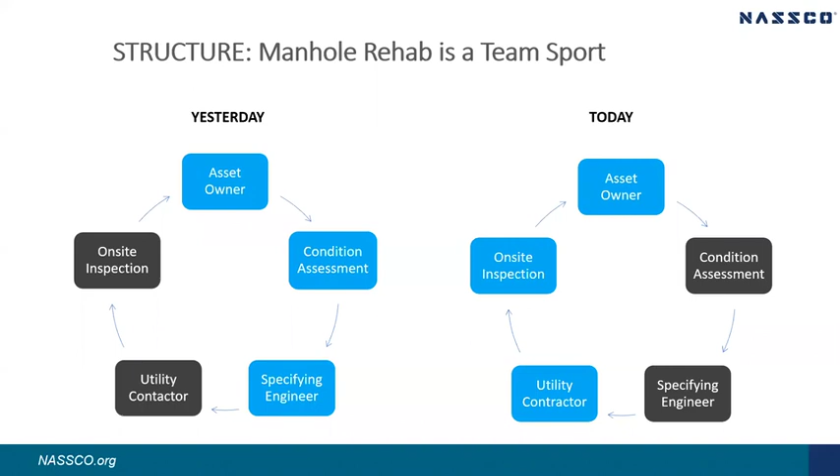To recap, yesterday we opened with the asset owner, Drew Muirhead, City of Brentwood, Tennessee, followed by Jim Harris of Jacobs on condition assessment, followed again by the voice of a specifying engineer, Carol Giokas of RJM Group. Today, we will open with our utility contractor, followed by on-site inspector, returning once again back to our asset owner to compare life before and life after a comprehensive team effort on manhole rehab with the City of Brentwood, Tennessee.

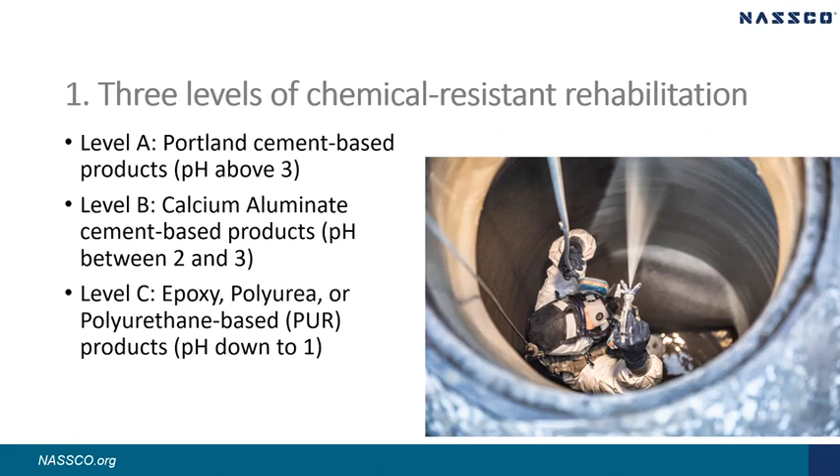My second point is that regarding calcium aluminate cements, please note that not all calcium aluminate cements are alike. There are 100% fused calcium aluminate cements where the cement and the aggregate are both calcium aluminate. And then there are calcium aluminate blends where the calcium aluminate is the cement, but the associated aggregates are less expensive materials.

Performance-wise, the differences are: 100% fused calcium aluminate performs down to a pH of 2, while the blended products perform down to a pH of around 3. If a design engineer does not specify, the contractor will choose the less expensive option, but the structure will not be as well protected in the more acidic environments.

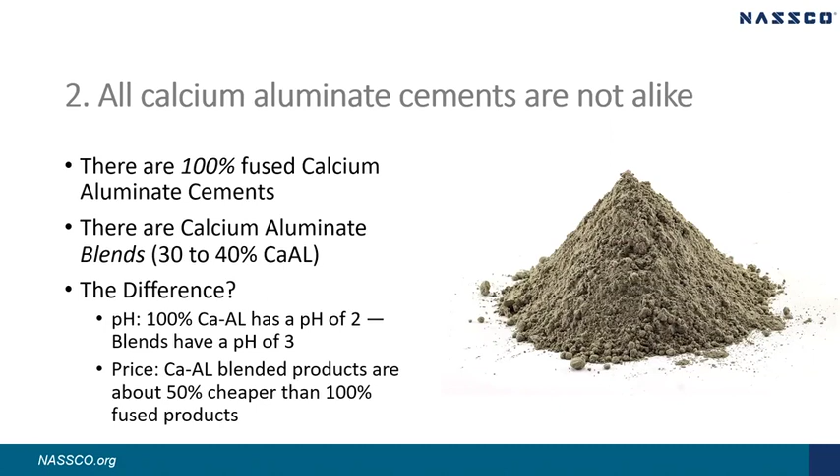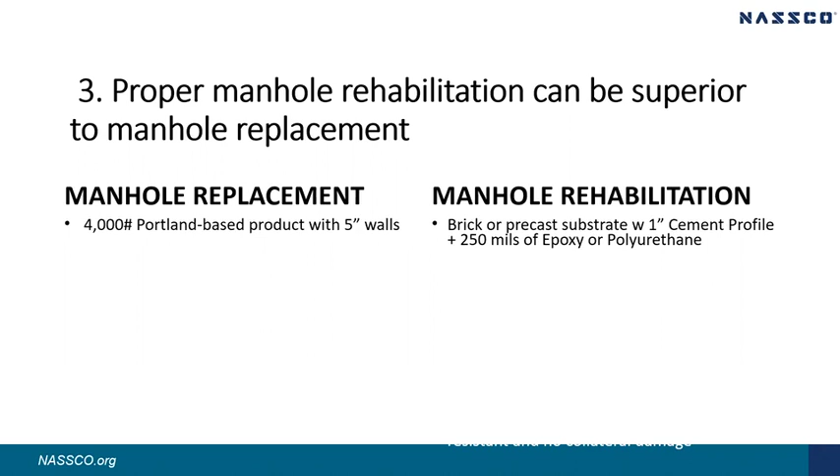Point 3: when making a replace or rehabilitate decision regarding a manhole, we often think that it would be best if we could just replace the manhole. However, proper manhole rehabilitation can be superior to manhole replacement in many cases. Let's compare replacing the manhole with 4,000-pound Portland-based precast sections versus spraying the existing brick or concrete manhole substrate with 1 inch of engineered cement profiling material and then topping it with 250 mils, i.e. a 1/4 of an inch, of either a polyurethane or an epoxy.

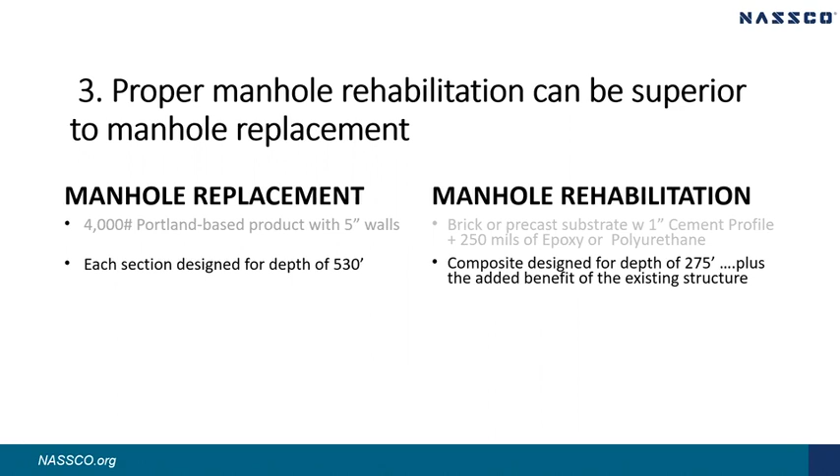In the case of replacement, each precast section is designed to a depth of 530 feet. Conversely, the cement profiling plus 250 mils of epoxy or polyurethane can perform down to a depth of 275 feet, plus the added benefit of the underlying structure.

The rehabilitated manhole will enjoy monolithic strength and cohesion, whereas the precast sections will suffer from weak points at each joint. The monolithic nature of the rehab manhole means that it will enjoy improved tensile characteristics and will not easily separate under hydraulic loading. I have seen precast cone sections separate at the barrel sections due to hydraulic uplift. This happened to manholes in a city in southeast Tennessee near the Tennessee River during a flood event.

Furthermore, since the composite rehabilitation enjoys acid-resistant polymer resin coating, it will enjoy excellent protection against microbial-induced corrosion. Manhole rehabilitation can enjoy the benefits characteristic of no-dig technologies. There will be no collateral damage to streets, sidewalks, yards, or other utilities, not to mention reduced public inconvenience.

So in many cases, the rehabilitated manhole will be lower in installation cost, plus enjoy the added benefits of being monolithic, acid resistant, and less disruptive to the environment.

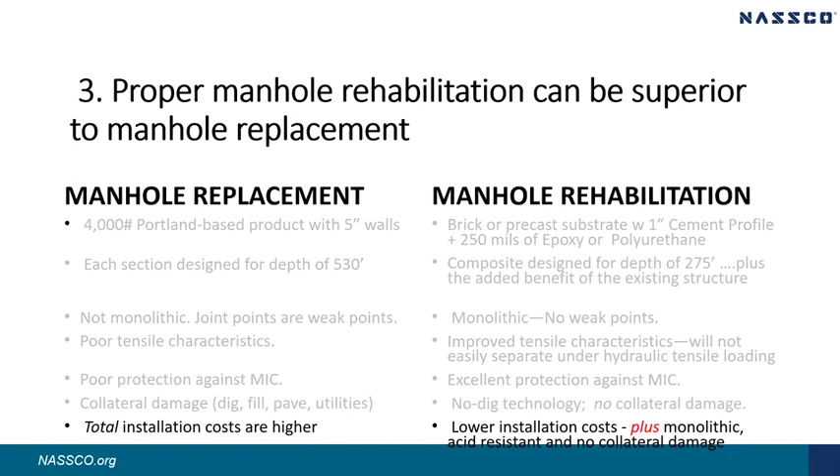My next point is that better sewer system containment is actually contributing to increased corrosion of concrete and brick manholes. As more basins are rehabbed to prevent stormwater infiltration, there is less dilution of the sewage. More systems are built with grinder pumps and lift stations that can cause splatter. More lids with holes in them are being replaced with solid lids, and in many places, specifications are calling for watertight bolt-down lids. These factors result in fewer opportunities for the system to breathe and more opportunities for latent bacterial growth that are the precursors to microbial-induced corrosion.

We see this anecdotally when we flip lids and see aggressive amounts of rust flaking off the bottom of casting lids. The point I'd like to make is more and more manholes will require level C polymer resin-based solutions in the future.

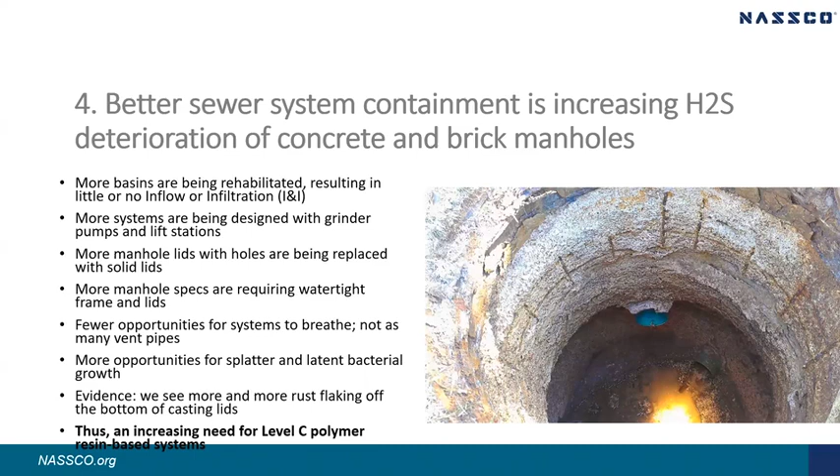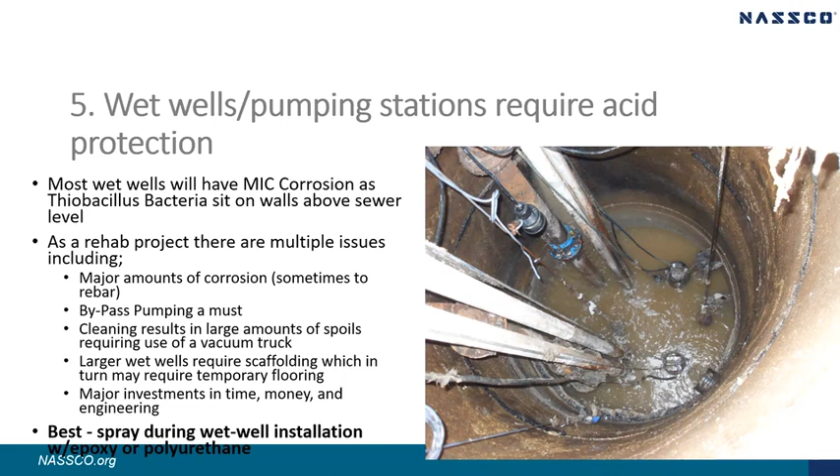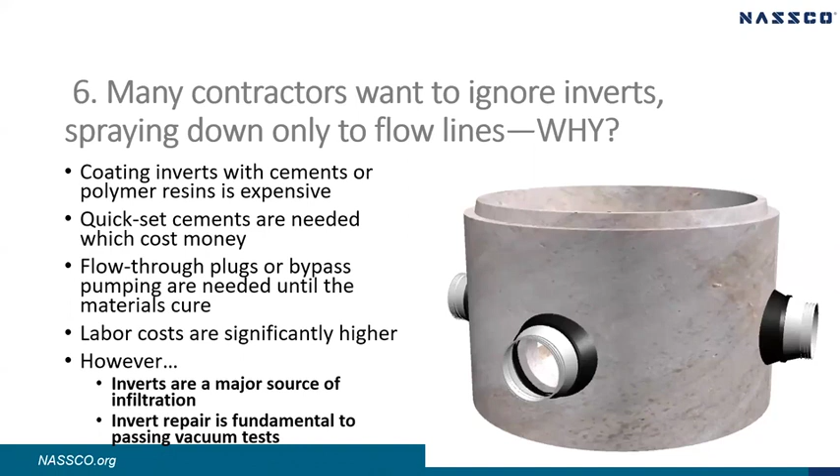Point 6: there are those who want to seal the manhole down to the flow line but avoid coating the invert. Why? Coating inverts with cements and/or polymer resins is expensive. Expensive quick-set cements are usually needed. Flow-through plugs and/or bypass pumping is needed in order for the materials to cure, and labor costs are significantly higher to coat the inverts. However, inverts need to be coated because they are a major source of infiltration. Secondarily, invert repair is fundamental to vacuum testing. No invert repair, no vacuum testing.

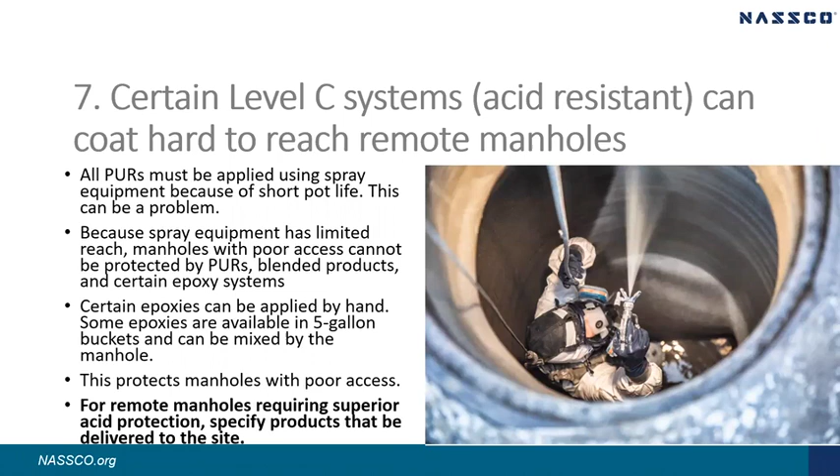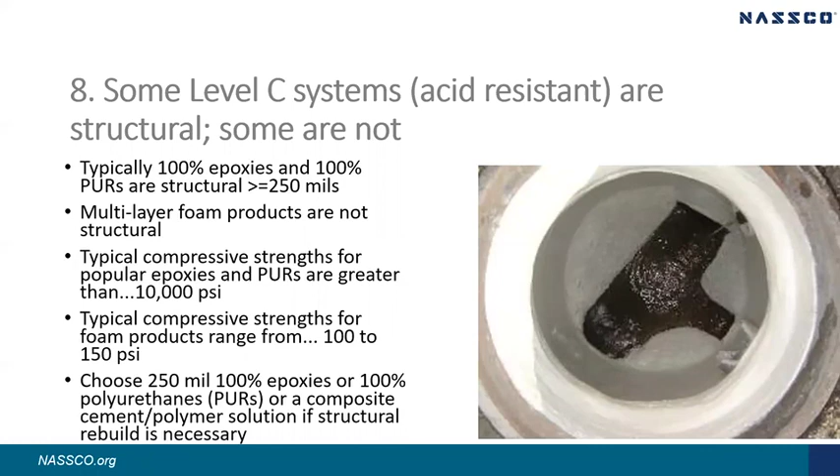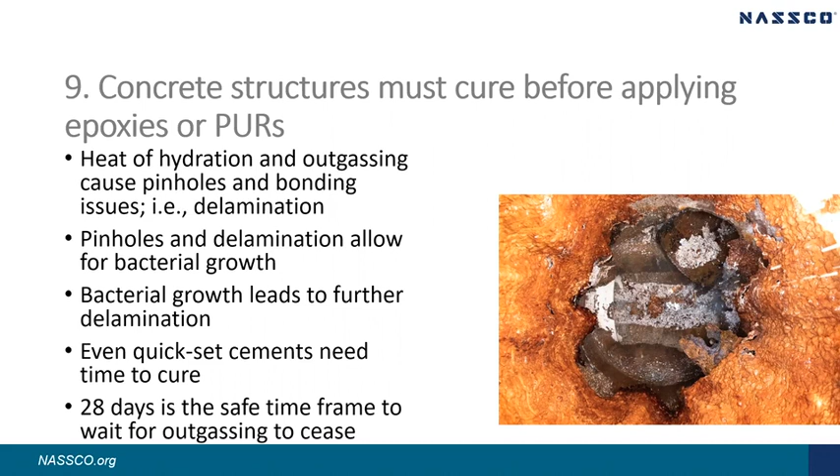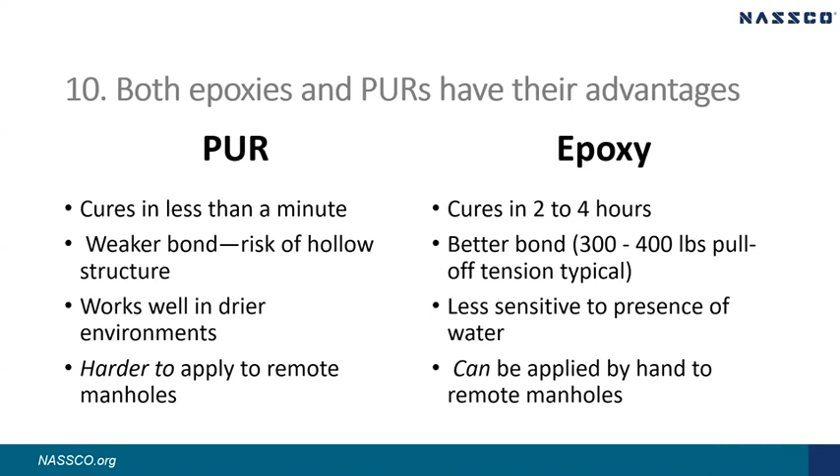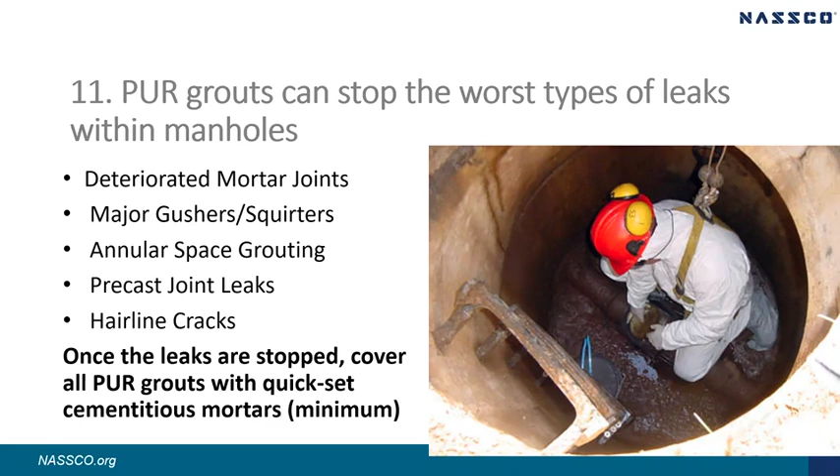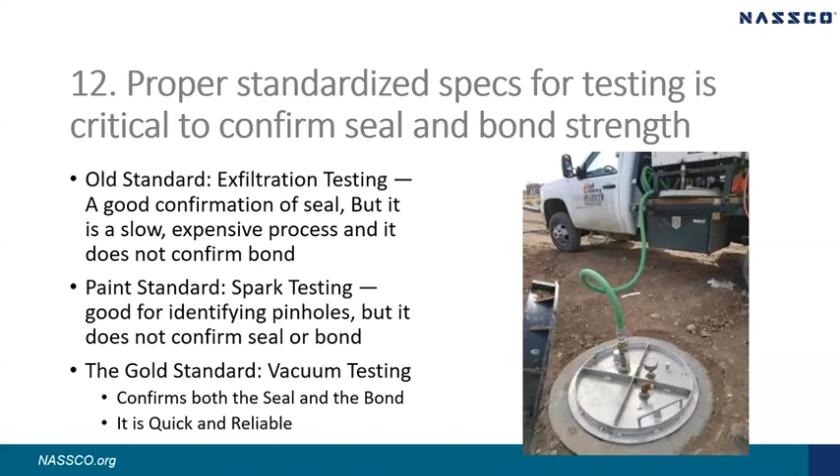Point 12: proper standardized testing on the seal of a manhole is important. The old exfiltration standard, where one seals the pipe penetrations then fills the manhole up with water, provides a good confirmation of seal, but it is slow and expensive, and it does not give a qualitative confirmation of bond. The paint standard spark test is critically useful for level C rehab coatings to identify problem pinholes in thin coatings, but it does not confirm seal or bond. The gold standard for acceptance testing for a rehabilitated manhole is vacuum testing. It confirms seal and can provide a qualitative sense of bond strength. We recommend vacuum testing to the ASTM C1244 standard.

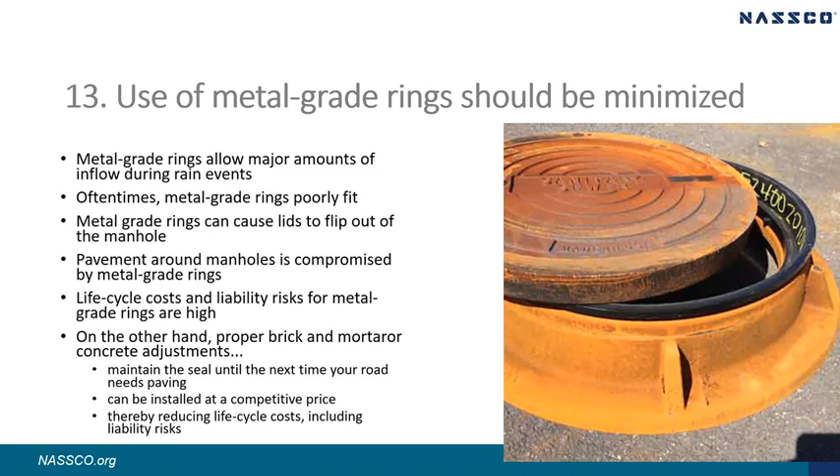So there you have it. 13 things I have learned in the manhole rehabilitation business. Why 13 things? Because we don't have time for any more. Thank you for your time.

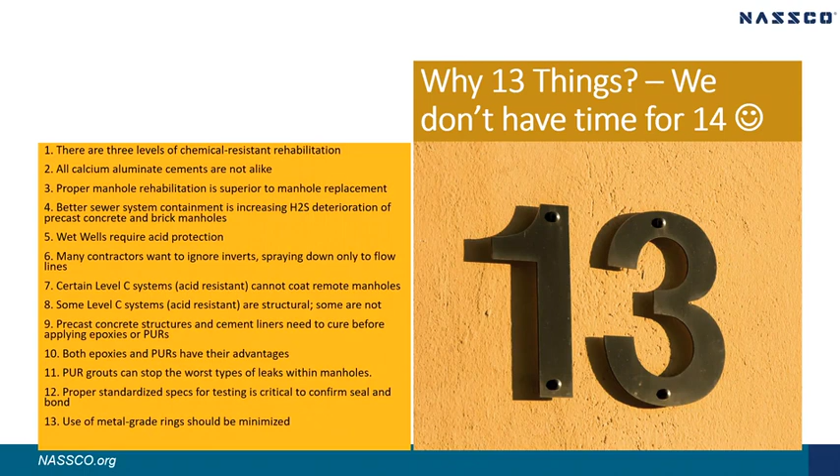Kurt, you're spot on with that. Thank you. You're special. Thank you. Your energy and enthusiasm is appreciated.

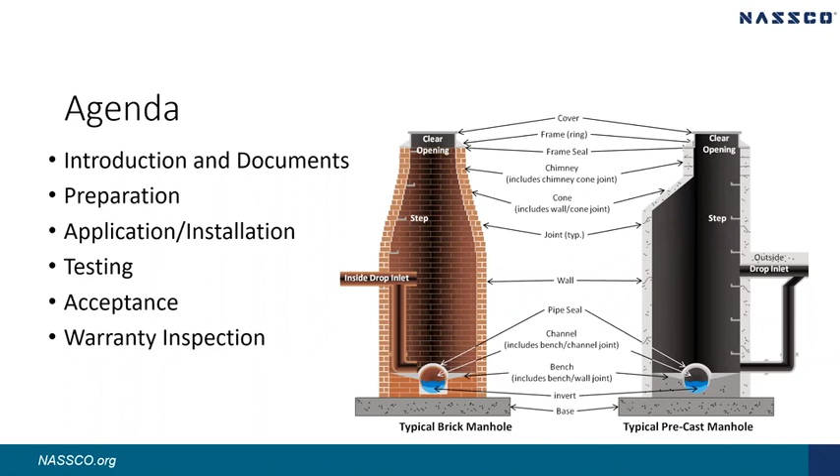As the inspector, you want to introduce yourself and let them know if you are certified or something. So I would say, hi, I'm Jerry Weimer, I will be your ITCP certified inspector. That lets them know that I do have some training or background in the inspection process, because too many times contractors show up and we have an inspector that has not been trained and knows very little about what's going on. So the contractor is constantly having to tell them what's going on, and the inspector has to rely on that contractor being honest.

And then you want to talk to them, confirm that the products to be installed and applied are going to be properly tested in accordance with the contract's requirements. So we're going to go over the manufacturer specs and technical data sheets and stuff that's in the contract. What does the contract require? What products will they be using? We're going to check and make sure they have the right ones. We're going to look at the physical properties of those and the SDSs. What are the mixing procedures?

We're going to go over those to make sure those are followed, and the application methods, because there are many different application methods depending upon the product. And what are the limitations of each product? Do they meet what we're trying to accomplish? And what is the preparation requirements for each of these? How do we need to prep? Because preparation is somewhere between 85 and 90% of your successful product. If the preparation is done correctly, you've got a shot at getting a good manhole rehabilitation.

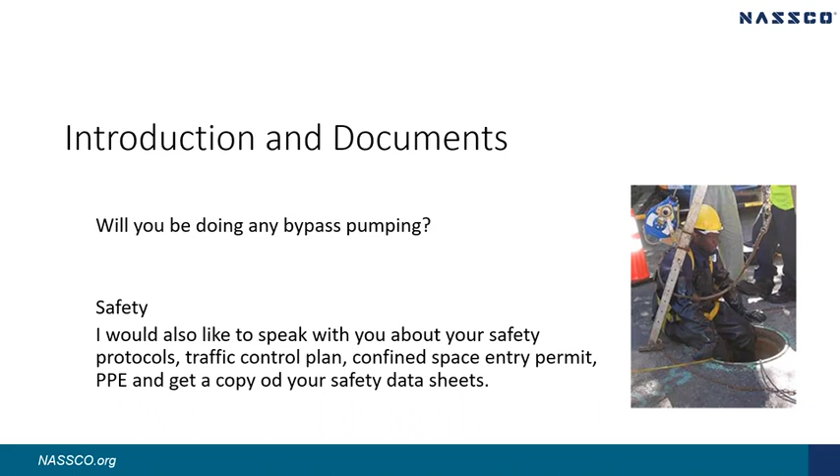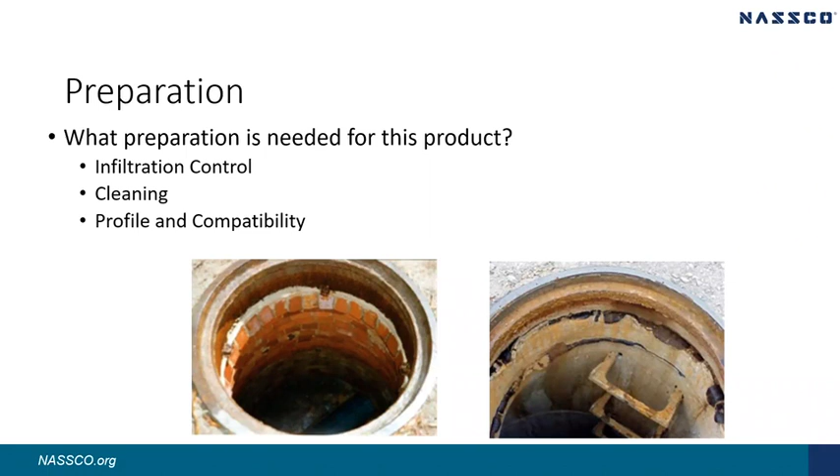So if we have infiltration, how are we going to stop the water? Typically we're going to use grout. Chemical grout, but there's a lot of different types of grout, depending on the groundwater type, the soil type, things like that. So we need to use the right type of grout. So what type are we using? And what is our gel time? Because that can be very important. Are we doing a longer gel time or a shorter gel time to give it time to set and make sure that it does stop the leaks that we want to stop?

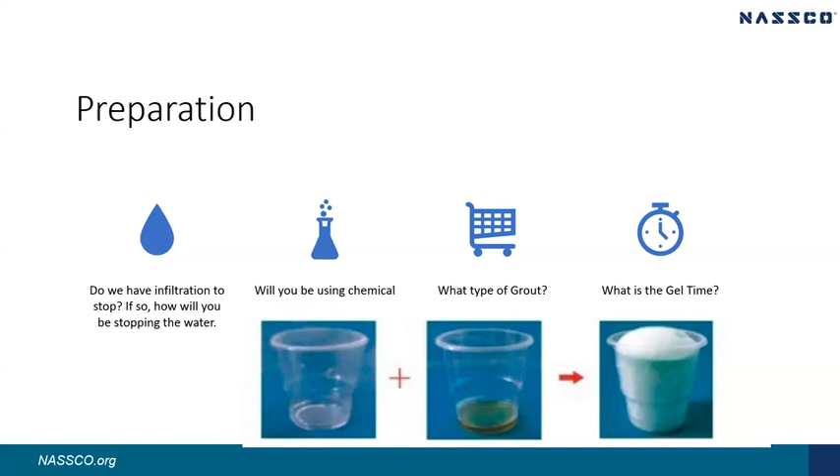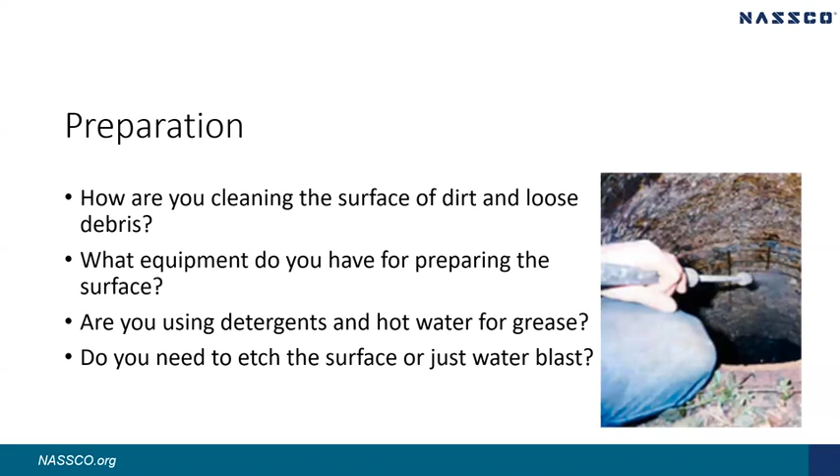So we got a couple of things here. We got moisture. Different products adhere with different moisture levels. Some need oven dry, no moisture whatsoever. Some air dry is okay. Some we can have a little bit of water there. And some can be damp or wet. I need to know with the product what level of moisture I have. What profile is required? Do I need a very smooth surface or do I need a rougher surface? What is the substrate that I'm trying to bond to? Is that compatible with the material that I'm using? Because not all apply, we got to make sure that our substrate matches our product.

The pH, is it within specifications of the product I'm installing? Again, pH is very important. And how are we testing that? And if it doesn't fall within specifications, what are we going to do to either bring it within specification or change to a different product? Like I said, the dryness level, we need to check that. And sometimes we do that using a vapor test, or is there some other method we're going to use to test that dryness to make sure it does meet the specifications?

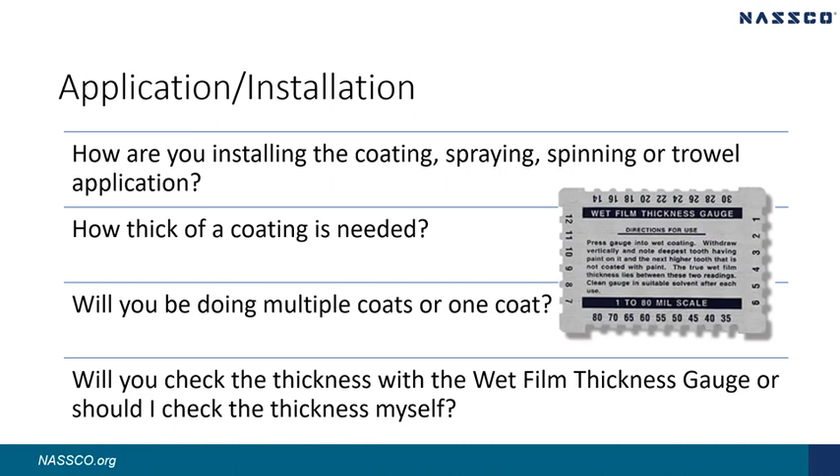And then we get to testing, the spark testing. Like we said in the poll question, the contractor will do the testing, but the inspector needs to verify it. So we want to test the spark tester against the rim, against the frame, make sure that it is actually working. There have been cases where someone spark tests it, and when they check it, the wires going into the box aren't connected to anything. So we want to test it before we spark test the manhole.

And then we circle all of the pinholes. That's what we're looking for, pinholes going through. We're going to document that, and we're going to document the repairs, because if there's pinholes, there needs to be repair, typically with the same material.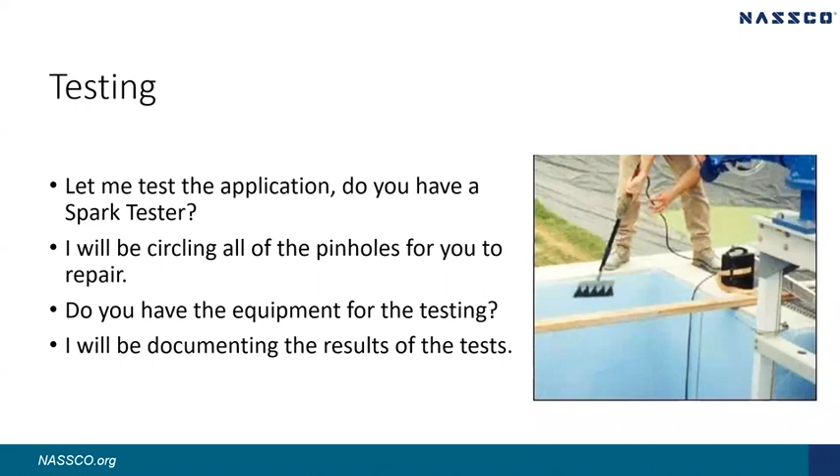If we're doing cementitious, we have slump tests we want to do. Is the concrete the right consistency? But we're also going to do compressive testing, either using a cube or a cylinder, and we're going to watch while the contractor fills these samples, packages them, and ships them off. We want to make sure the samples sent off are the ones from this manhole, and we need to do this at each one. So we want to make sure the documentation is correct, and we track it and sign off on these things to make sure it's done correctly.

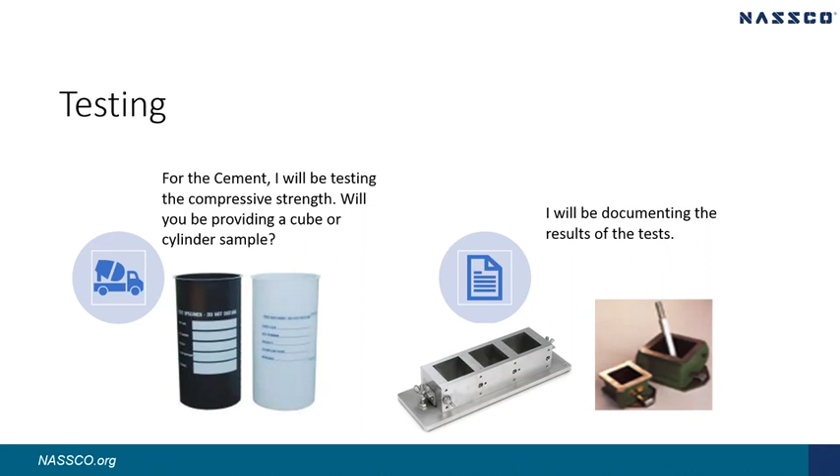Are we doing core testing? Or ultrasonic? When was the last time your equipment was tested, when was it calibrated? The pull test, we're going to pull samples off to check the adhesion of epoxies and polys, things like that. We need the right size sample, and we need to check what is the pull strength that it takes off, and what are the repair techniques we're going to use to fix those samples.

Are we doing ultrasonic testing for thickness? That's also important. But when we pull those coupons, I'm going to check the thickness there. That's another double check on the thickness of the material, to make sure it is the proper thickness. And I will be documenting the results of all of these as I go through.

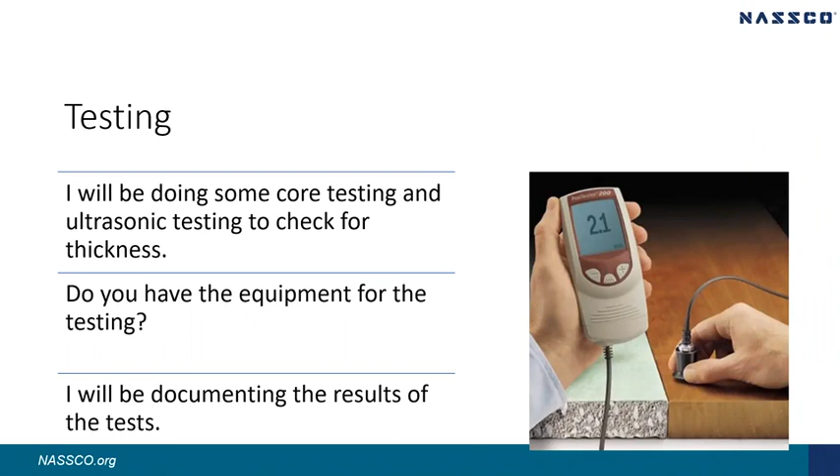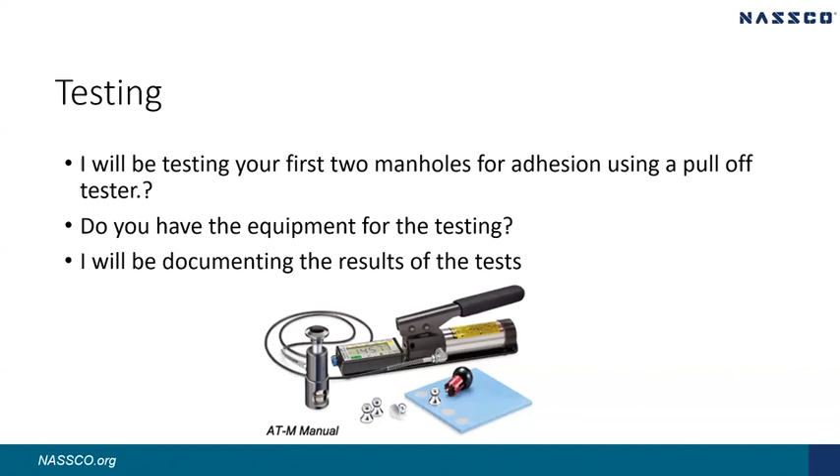I'm going to absolutely test at least the first two manholes with the adhesion testing. Depending on how those results come off, I may end up testing every manhole, or I may just do them at random, depending on whether the results are good and everything else is going well. I document those results, but I want to make sure I am testing as needed to confirm our products are installed properly and they're going to last. The bonding is good.

Because sometimes we do everything right, and then a year later something comes through, a slug of something, and it makes it fail. Well, we can go back to the record. Yeah, it was installed right, so let's see what happened that caused it to fail, if it was installed properly and everything was mixed, everything was done properly.

Then we talk warranty inspections. It's very important that we do warranty inspections on time. In the contract, it should say who is doing the inspection and what type of inspection it's going to be. Are we going to do a vacuum test, a pull test, or a spark test within that warranty period? And what are the agreed upon repair methods if it does fail?

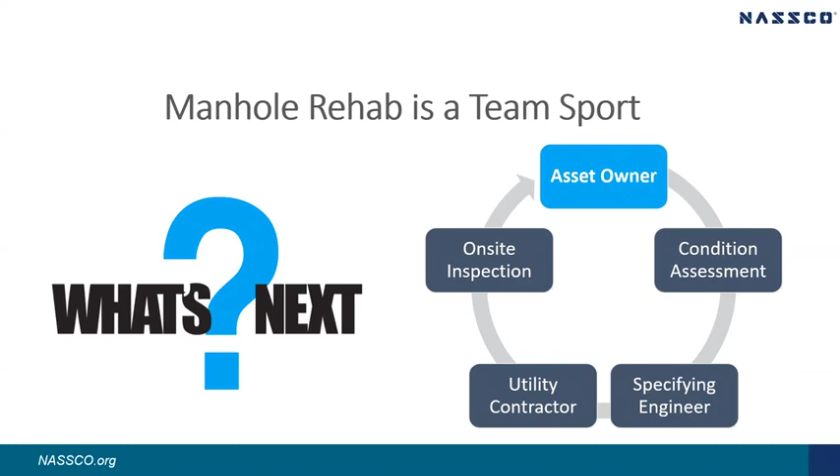So what happens when you hear the stories of 5 experts who understand the meaning of team relative to manhole rehab? You go back to the beginning. But once again, it's time for our 6th and final poll question, and I'm betting everyone will get this one right.

So here's the question. What's the most important task to turn chaos into calm as a municipal asset owner? Get your asset inventory as accurate as possible. Condition assessment is completed for planning and budgeting. Make sure the specification is clear and concise. Hire a competent utility contractor. On-site inspection is confirmed. All the above. I'll repeat the question: what's the most important task to turn chaos into calm as a municipal asset owner?

In a moment, we're going to bring up our municipal asset owner and let him finalize his thoughts. And the answer is, oh my gosh, all the above. So there really isn't a right or wrong answer to this question, but I really like how you've leaned toward all the above and grasping the idea that to do manhole rehab justice, it takes a team effort.

Thank you. Maybe at this point, Drew Muirhead does not need an introduction as our asset owner, but I'll encourage his thoughts on life before and life after a comprehensive rehab program, including mainline pipe and manholes and laterals, and how he benefits today from a team effort not so long ago. Welcome back, Drew Muirhead.

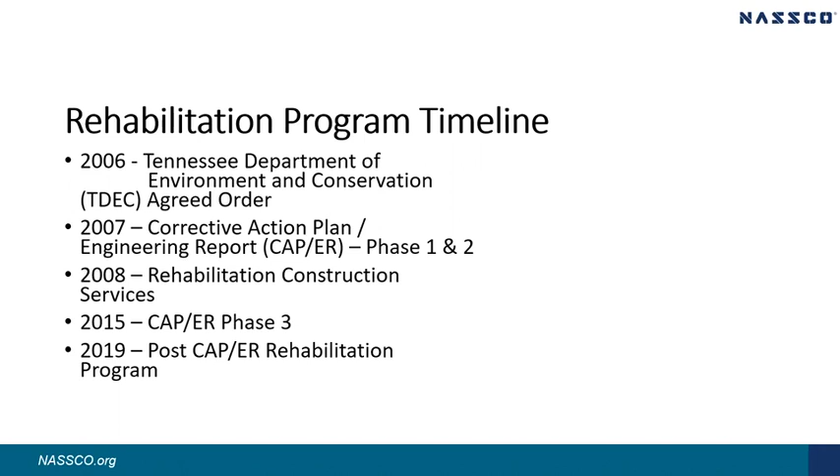Going back through each of the different phases of our program, from 2008 through 2015 we ended up rehabilitating about 20% of our system. The approach we took was to get into an area and do every aspect of the sewer infrastructure—rehabbing the line, the laterals, and the manholes on either side of that pipe segment. The idea being that we'd not only prevent or stop current leaks or defects, but also be proactive in preventing future issues with that aging infrastructure.

So in those early years, a big portion of our rehab involved about 25 miles of CIPP on our clay and concrete system. And as it relates to this presentation, we ended up doing about 1,200 manholes during that phase.

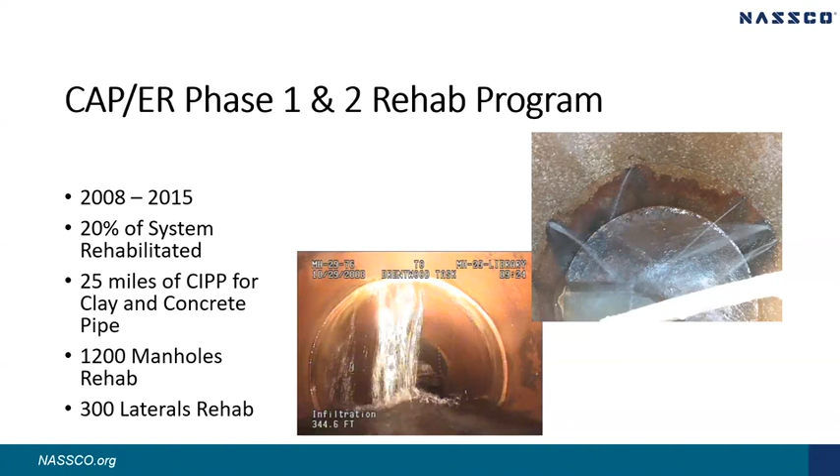I want to take a moment and tell a little story. I think this story fits well with the presentation and the team aspect, and with the presenters who have come before me here today and yesterday.

In 2013, toward the end of the year, using our flow monitoring analysis and the hydraulic model I mentioned in yesterday's presentation, we identified an increase in our average daily flow. So we inserted some additional flow meters, did some additional I&I analysis, and narrowed it down to a portion of our trunk line that runs through a large farm pasture area—one of the last remaining areas here in Brentwood. This trunk line section runs along the Little Harpeth River that flows through Brentwood.

We looked at the branch segments that tie in, and the flow we were seeing just didn't add up—it left us scratching our heads. A year prior, we had actually rehabbed the 24-inch clay pipe through this area as well. So we felt it was time to do our manhole rehabilitation for this portion.

So we brought in our rehab contractor and began manhole inspections and the rehab work. But during that process, we didn't come across anything significant that would amount to the flows we were seeing through that area. As our manhole rehab contractor began work, they were actually prepping one particular manhole.

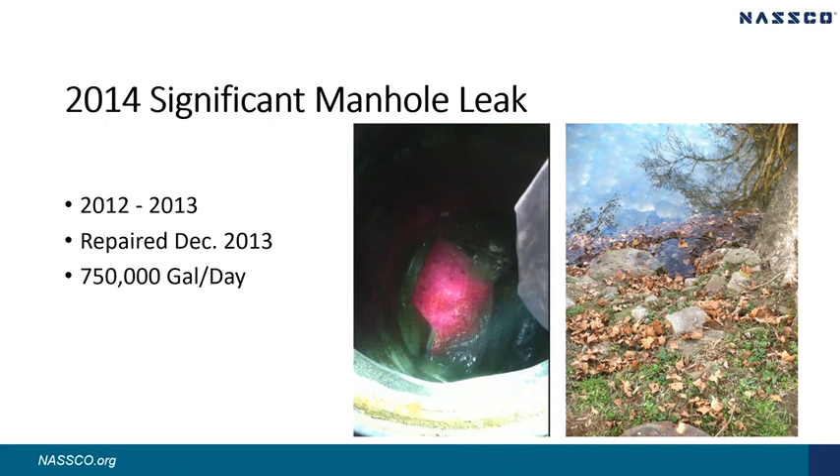To continue on through our years of rehab, 2015 to 2018 was another phase. Again, we did about 6 miles. We kept with our same process of going into an area and doing everything from the main lines, laterals, and manholes. At this phase we did about 400 manhole rehabs. Our manhole rehab process was a cementitious coating followed by an epoxy top coat.

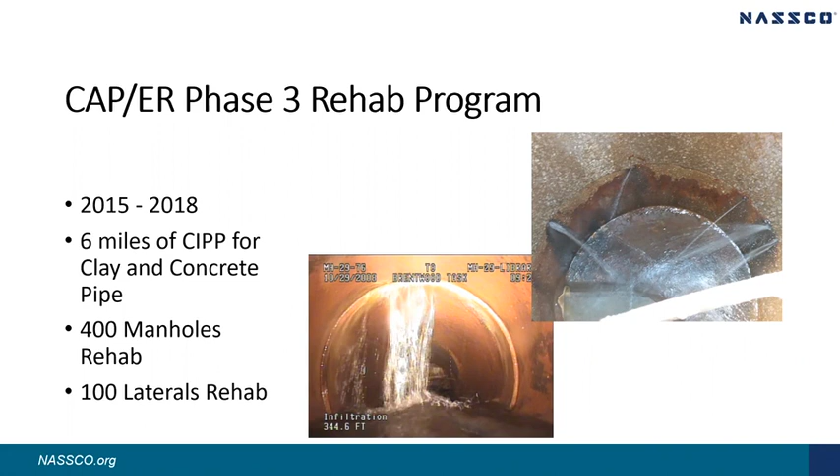Now, as an owner, one of the big things we're interested in, mostly from a regulatory standpoint or from our city managers or commissioners, is: you're spending all this money, doing all this manhole rehab work, causing neighbors and residents to be angry at you—what's the benefit? What are you getting out of all this? So I'm going to quickly go through a couple slides to show some results from our program.

This first slide shows our annual overflow events and rainfall. You can see in 2007, just before we began our actual rehabilitation efforts, we had about 16, and then 18 in 2008 overflow events. You can see our rainfall was kind of steadily increasing.

Then after that, from 2008 to 2010, which is when we did a good majority of our manhole rehab and other rehab efforts, you can see our overflow events going down. However, our rainfall totals stayed around 45 to 50 inches a year, and you can see our efforts kind of continued and stayed level.

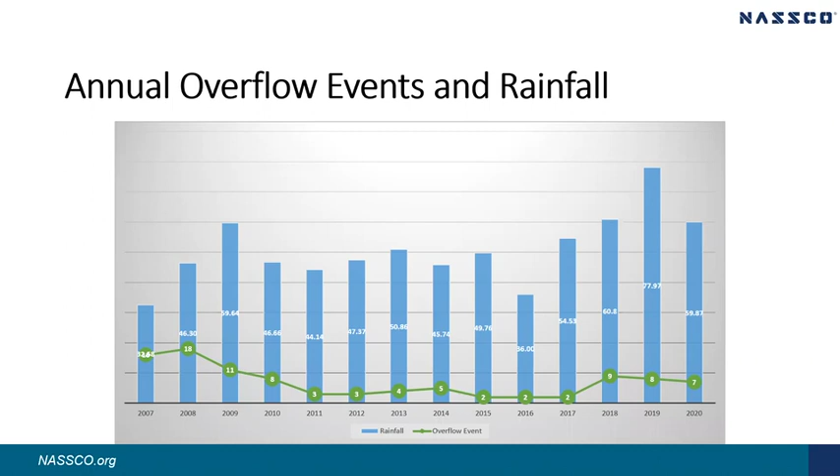Another thing to note, there in 2018, 2019, and 2020, you can kind of see while our rainfall increased, our overflow events increased. That's part of the reason why we've continued and stuck with our rehab efforts, continuing to utilize manhole rehabilitation as part of those efforts.

Just another quick snapshot of our work and results. In 2008, when we began our rehab program, the annual rainfall by 2020 went from 46 to 59 inches—an increase in annual rainfall of 28%. The number of overflow events went from 18 down to 7, a 61% decrease.

What's interesting, and again these are just estimations, but it gives you a big picture idea: our total overflow duration in hours went from about 1,800 hours in 2008, when we started collecting that data, down to 186 hours in 2020.

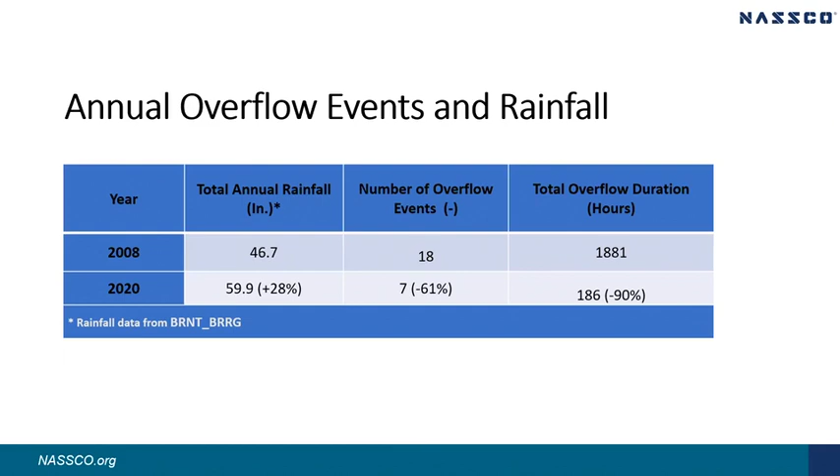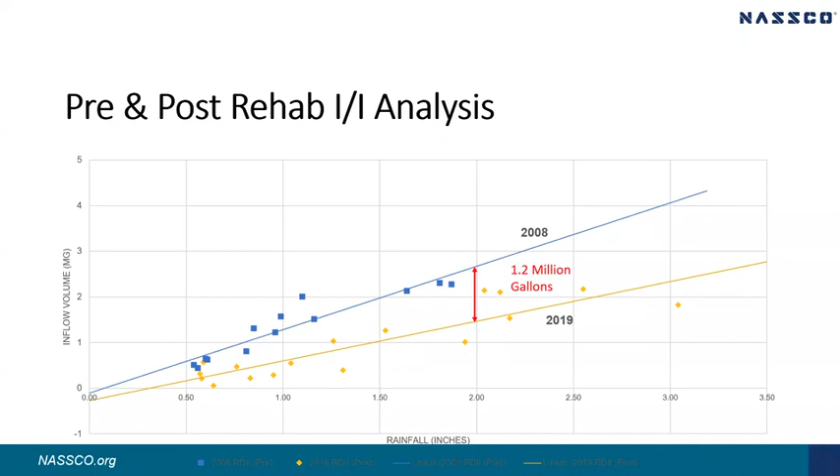So some more results, pre and post rehab analysis from 2008 to 2019. This is annual I&I that was calculated, and our engineers have estimated about 1.2 million gallons annually we've removed through our rehab efforts. Keep in mind, we don't have a treatment plant, so everything we collect we have to pump out, and we pay basically a per gallon rate to have our sewer treated. So that's a direct savings on our annual budgets from those rehab efforts.

I'll talk briefly on our city growth. Two things out of this slide: there's a 15% increase in city growth and population, and the reason we were able to achieve that was through our rehab efforts and flow monitoring analysis, being able to document our efforts with flow reductions. We were able to go to our TDEC regulatory agency and show them the work we're doing, the time and money we're spending, and the benefit of that effort. So we were able to get moratorium relief from new connections and have a controlled and monitored growth with our city.

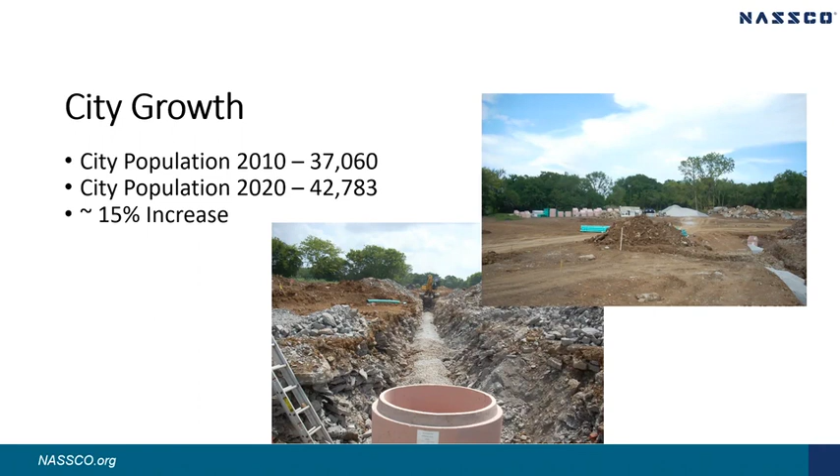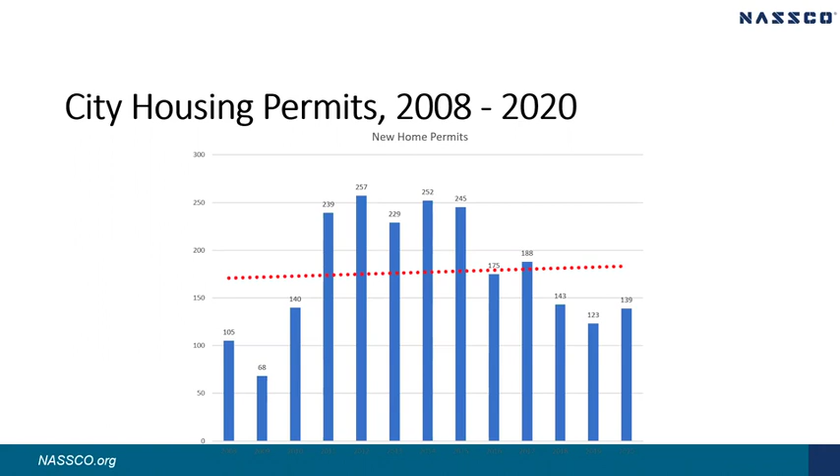Just another brief slide on growth and how our housing permits have gone up over the years, and here recently they've started to decline, but there's still been a gradual increase in growth here in Brentwood. So I say all that about our growth, and while it hadn't been huge growth, there still has been a positive growth.

But our average daily flows have gone down during that same time period. We've actually seen a decrease of almost 1 million gallons a day in our average daily flow throughout a year. And again, that can be completely attributed to our rehab efforts, particularly our manhole rehab efforts that we've put forth over the last almost 15 years now.

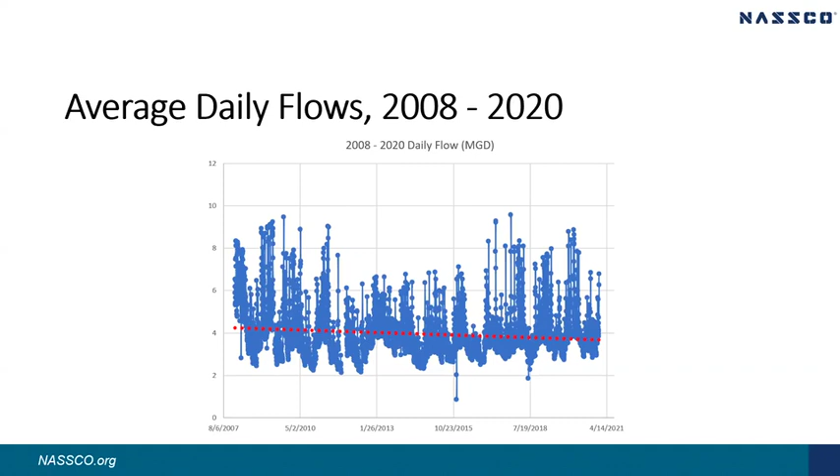So where does that leave us today? We are continuing on with our rehab efforts. 2019 through 2027 is currently what we've outlined, with some parameters and requirements in place. We're continuing with CCTV, we've established 200 manhole inspections annually as our minimum goal, and we've also begun to implement other methods of testing for I&I, including smoke testing.

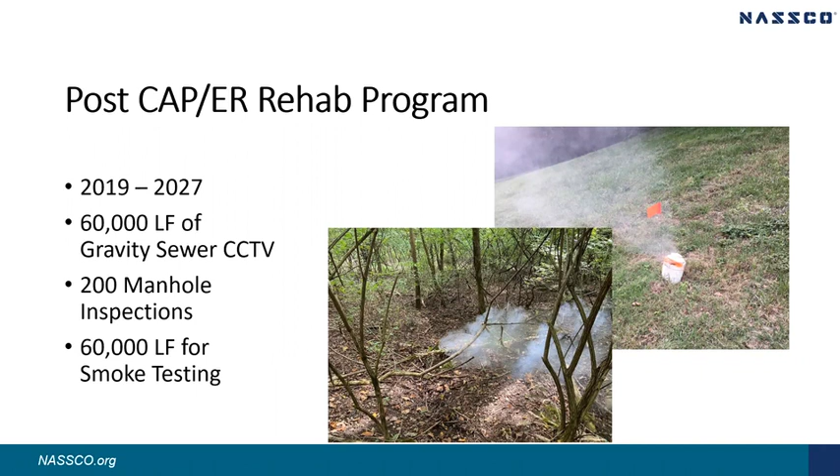I put this slide in here, and it may not be the greatest thing to talk about in a rehab presentation, but as the owner I feel it's good to provide the information and be transparent about what we've learned over the years. Our CAP/ER and our initial program has always outlined an EQ basin, and we actually installed one, and it's online now as of December 2022. It's a 4 million gallon basin.

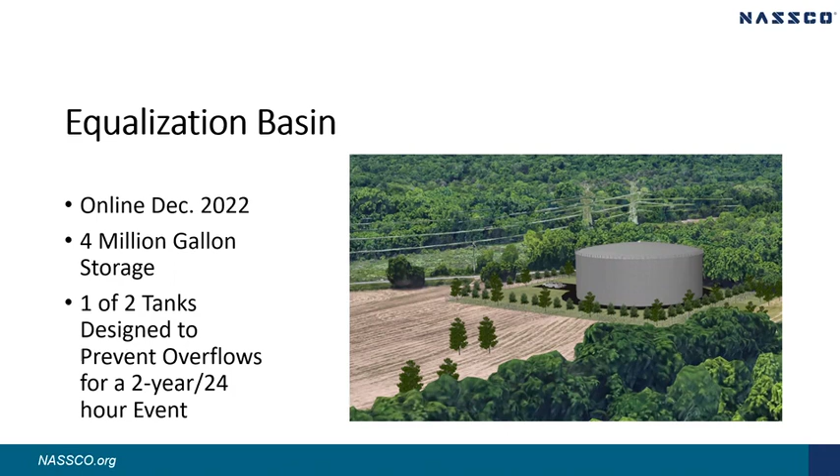While that's beneficial, I also want to note that we've obviously continued with our rehabilitation program. I feel you can't have one without the other. If we would not have done the manhole rehab work over the last 15 years and other rehab efforts, the size and number of these tanks would definitely have been a lot more than what we ended up doing. Our manhole infrastructure continually ages, it doesn't get any better. So it's an ongoing process, and working with our local regulatory agencies, we've determined that even though we're utilizing the EQ basin, we're going to continue on with sewer rehab, as we feel it's been effective and we've achieved a lot over the years.

So in summary, life is good and finally in control. I've walked you through as an owner at the beginning - it ain't easy being me at the beginning. It's very difficult: regulatory, financials, trying to put together the team as we discussed through all these other presentations, working with different skill sets and disciplines to put together a manhole rehab program and products that work for your local city and community. That's resulted in great results for us, and we're looking to continue that work for the future here in Brentwood.

And with that, I'll turn it back to you.

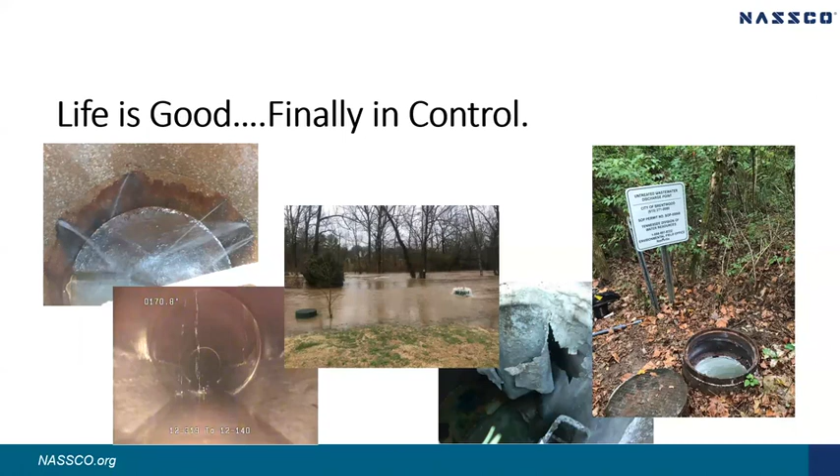Drew, we really appreciate the factual storytelling of your experience there. You opened it and closed it with a good benefit case.

Ideally, other municipal stakeholders will be encouraged to fight the good fight, to control I&I, to mitigate SSOs, and to enhance the life cycle of their underground assets. Those are the numbers that are worthy of posting on a scoreboard so the entire team can celebrate victory.

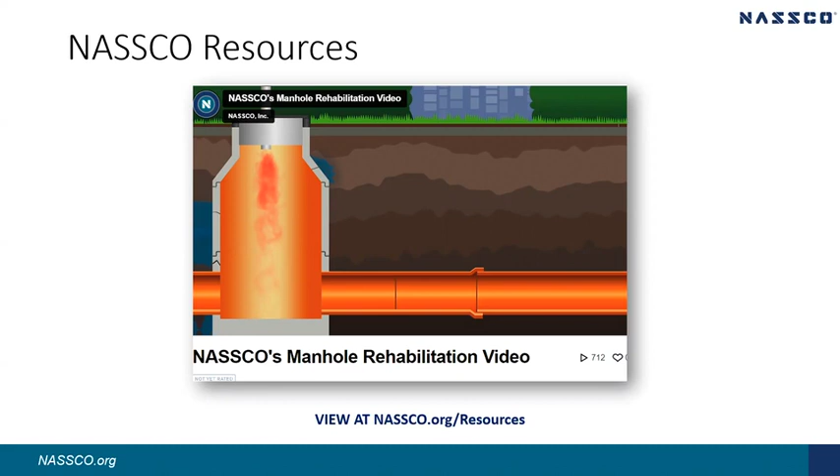And then we also produced a great Manhole Rehab video. It is on our website. It's also on our Vimeo site. It is something you could actually download if you'd like off of Vimeo and use on your website, perhaps. But we encourage you to watch that. It's a short video, but it gives the whole picture on all of the different technologies available for manhole rehab.

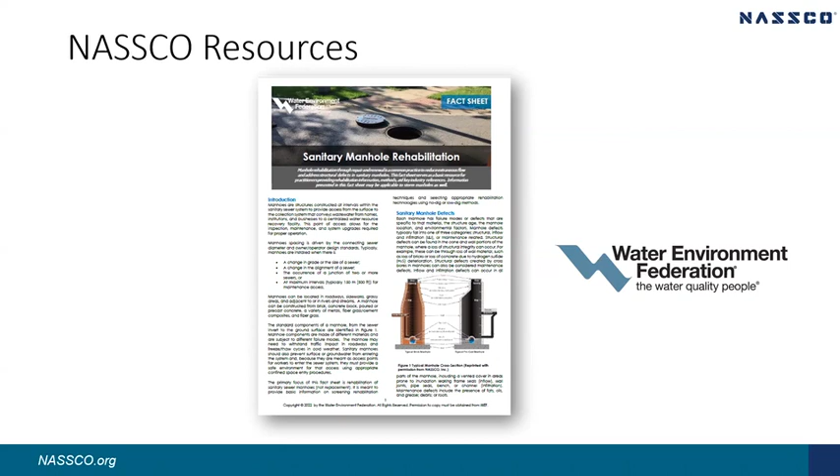And then this committee also worked with WEF, the Water Environment Federation, on a sanitary manhole rehab fact sheet. So that is another resource. Again, many things available to you on NASSCO.org. We invite and encourage you to take advantage of that.